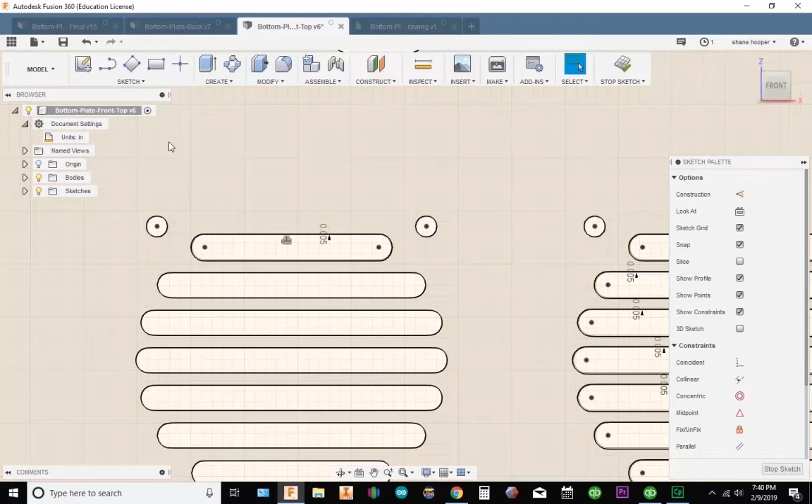And I'm going to offset each one of these over 5 thousandths.

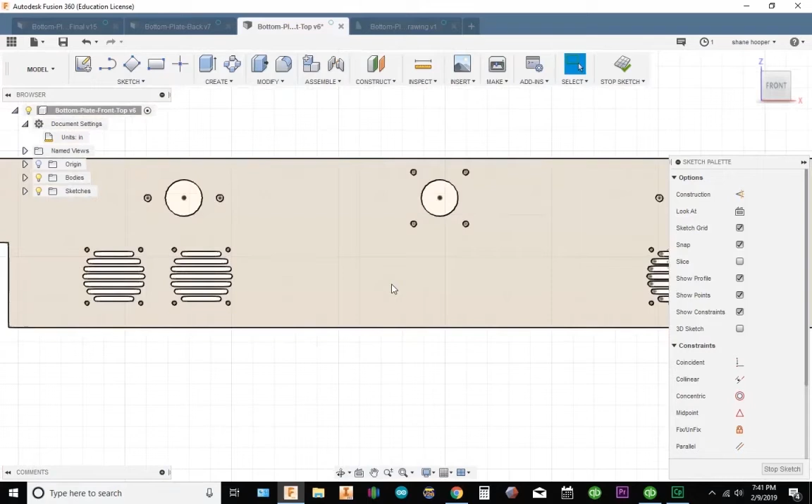Now, I could go through each one of these and do the same, but most likely this is symmetrical, so I'm going to cheat. I'm going to come in and draw a construction line.

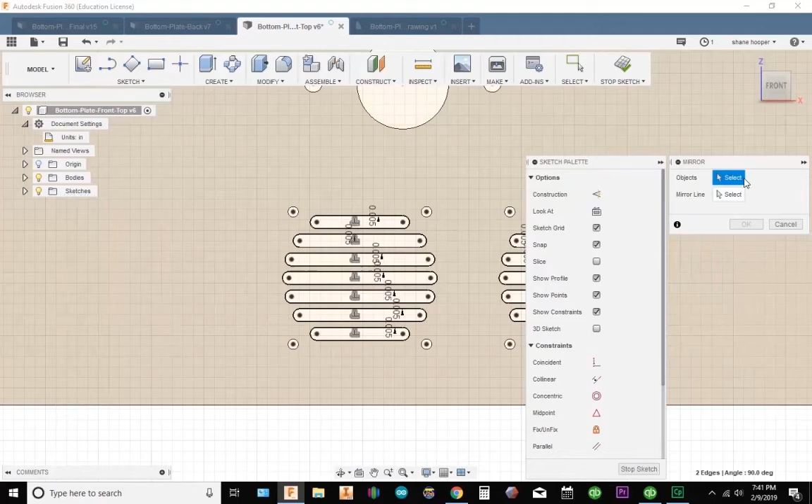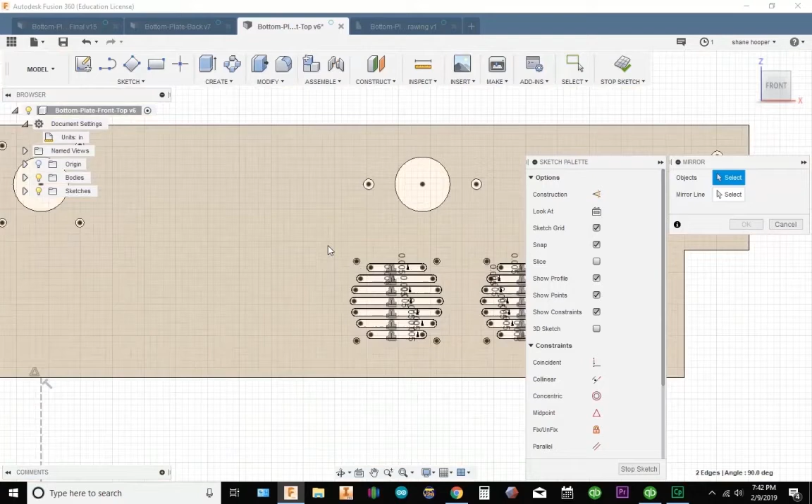And we'll actually mirror all this geometry. So let's go to Sketch, Mirror, Objects. Let's see if it'll just let us select all of this. That's the cool thing about Fusion 360, sometimes you can just cheat.

Alright. Mirror line. I'm going to select my construction line. And what do you know? It's symmetrical. If anybody's got a better way to do this, let me know.

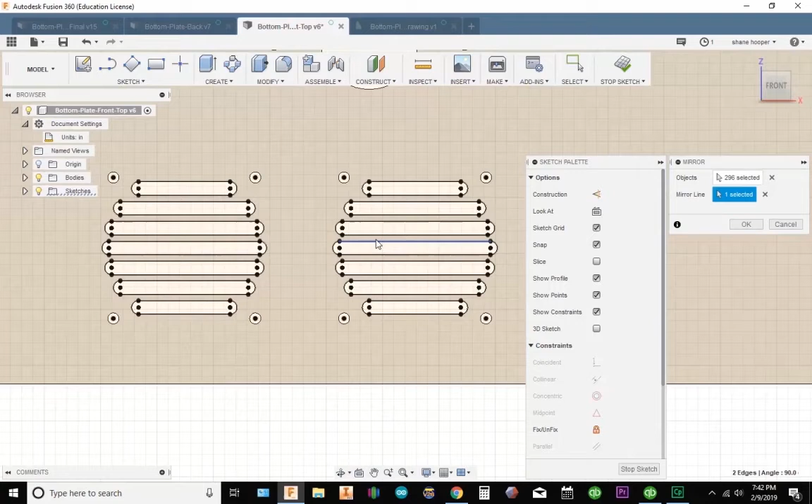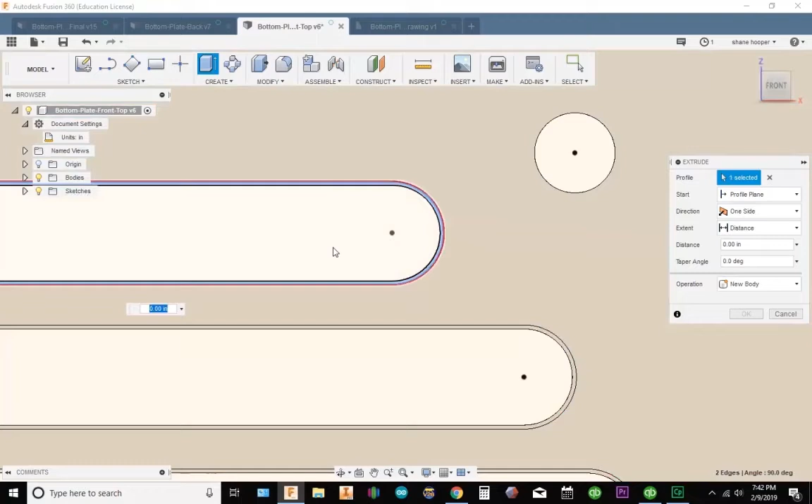So I'm going to hit OK, zoom in, make sure all my geometry is the way I want it, and it looks good. Let's go ahead and go to Create. We'll zoom in. I'm going to select this, this.

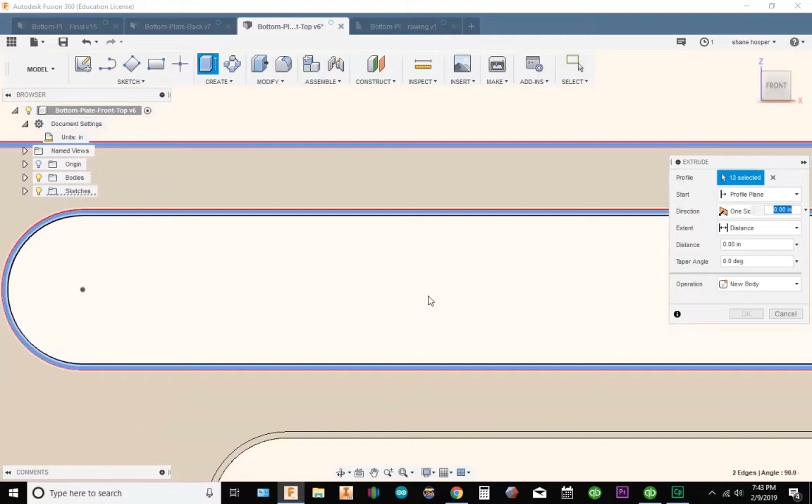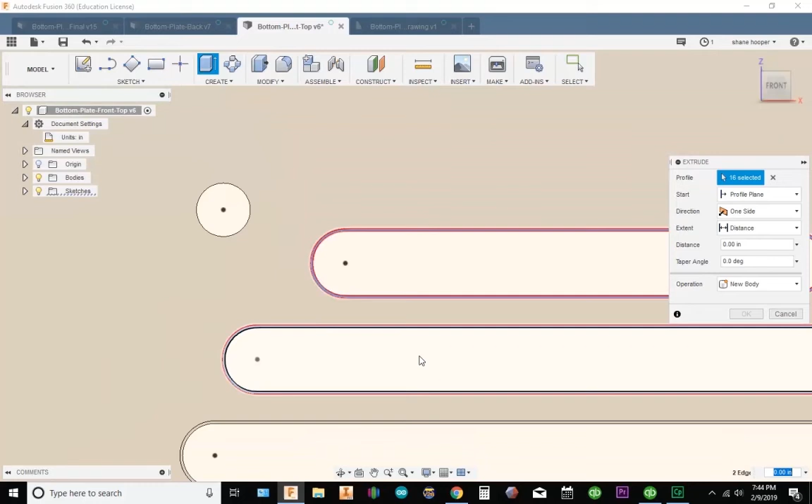And there's probably a better way of doing this. I'm already kind of committed, so we're going with it. If anybody's got a better way, let me know in the comment section, and I'll try it out.

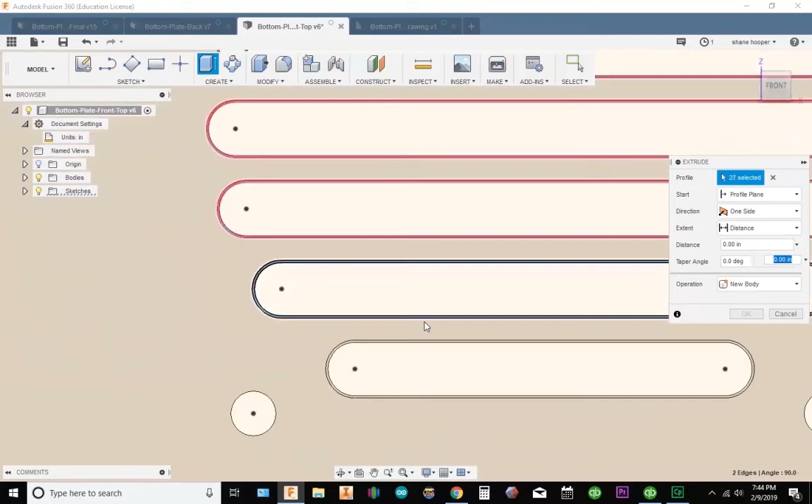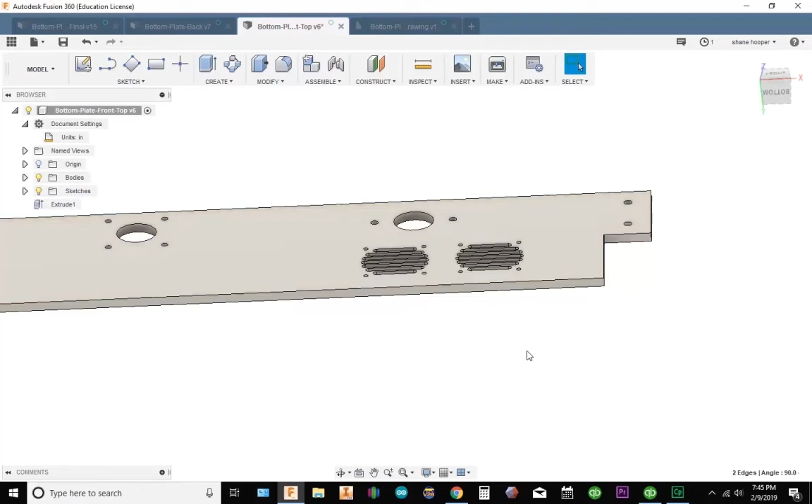Alright, cool. I'm going to tilt my model and pull down. We'll go ahead and put it in top view. And let's double check ourselves.

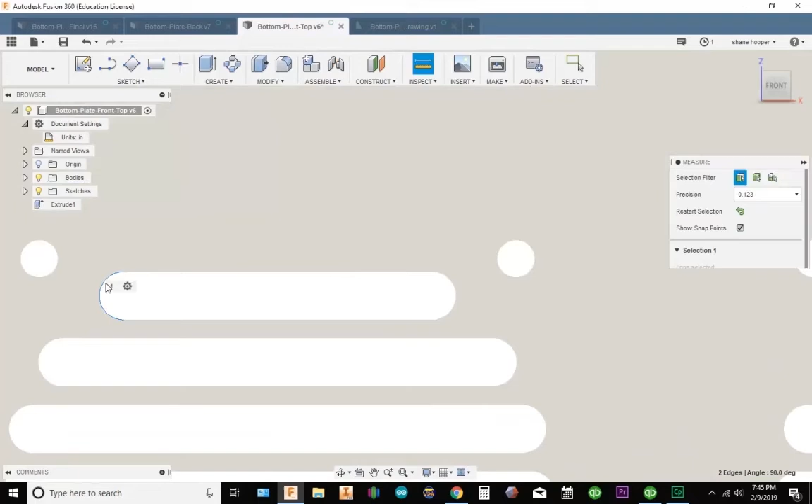So if I measure this diameter right here, it should be bigger than an 1/8 inch. I got 0.128. Perfect. Let's measure each one of these. I'm going to hit I for inspect. And it looks like we got everything.

So what I'm going to do, since I've modified the model, I'm going to save as and pretty much duplicate it as a modified version. I'm gonna hit save.

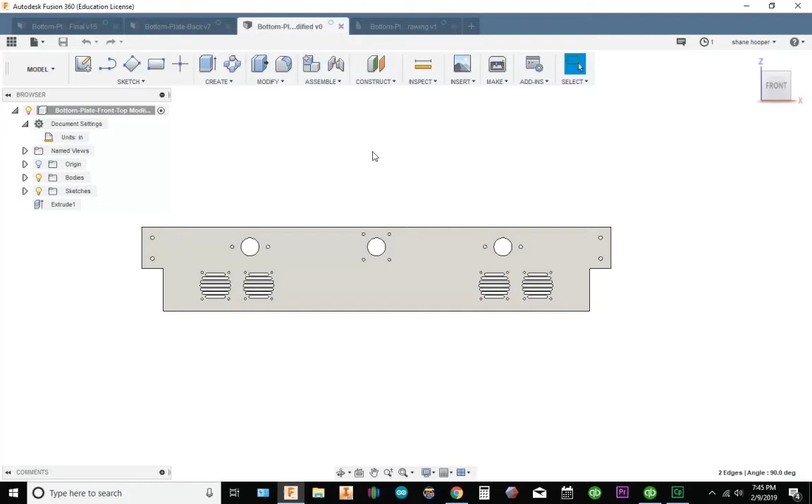Let's go back to manufacture. Now, since I changed the model, it threw up warnings. So I'm gonna right click on my op, regenerate. It's gonna fix everything.

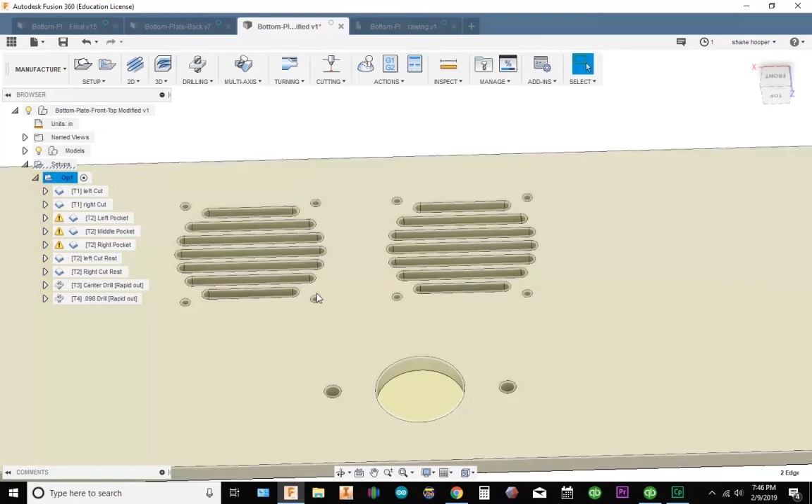Alright, so I'm going to cut each one of these slots. Now these slots are actually vents for a fan for his 3D printer. So I'm going to go to 2D Pocket.

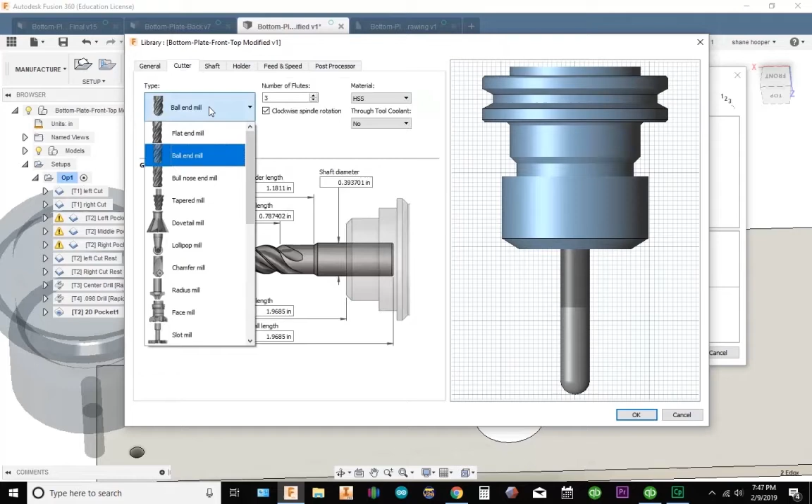Tool. Let's create an 1/8 inch tool. So I'm going to make a 1/8 inch end mill. Go cutter, it'll be flat end mill, 0.125 diameter.

Speed 3500. And since it's such a small end mill, I'm going to go really slow. I'm just going to go 10 inches a minute.

Now, there probably could be a faster way to do this. If you got a faster way, let me know. I'll be the first one to tell you. I don't know everything. Tool number 5 sounds good.

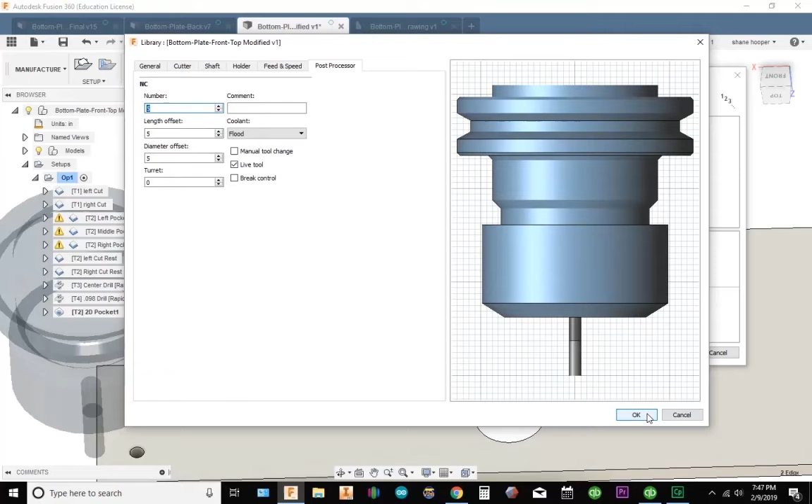Go ahead and click OK. Geometry. Let's go ahead and select our geometry here.

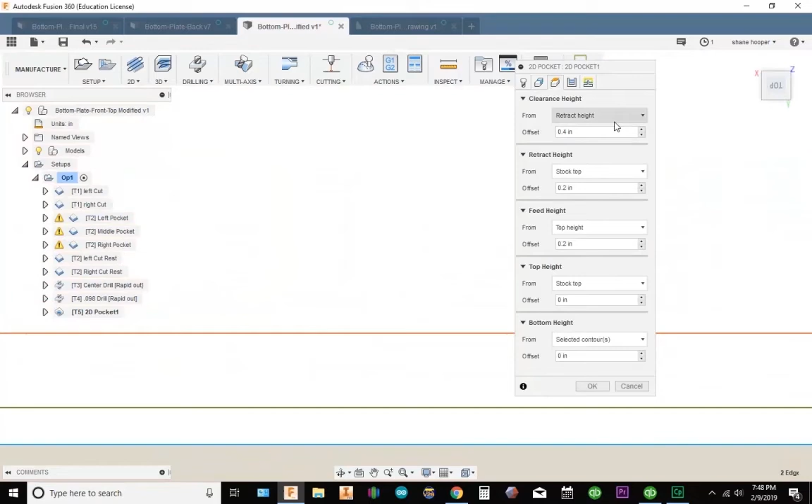Clearance height, because we have clamps, let's go 0.6. Retract height, we're just going to do 0.1. What we're gonna do is pretty much do each one of these vents. Then the last one, what we'll do is then we'll slide over and retract to 0.6. Actually, let's just make that 0.6.

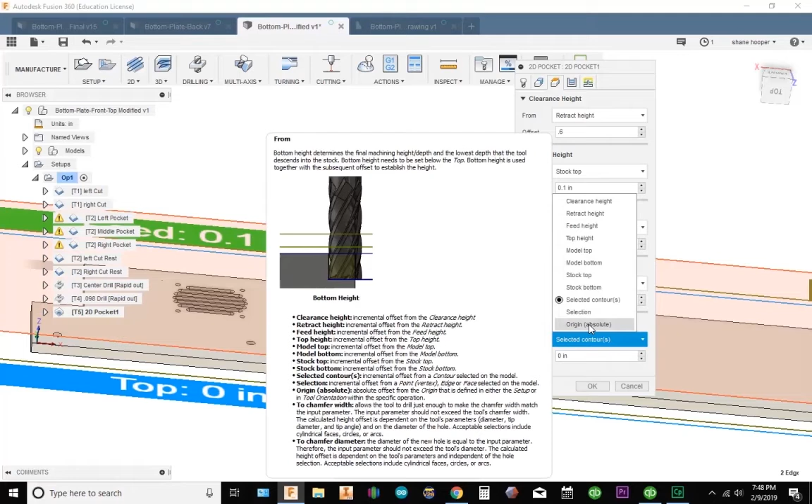Okay, so retract height 0.1, top height 0.1, bottom height. I'm gonna do my origin. Let's go absolute. I'm probably gonna go about 0.035 depth of cut.

So what we'll do is we'll make our offset down. Let's go minus 0.235.

Passes. Right here, my maximum step over will have to be, we'll try 0.12. We have to have room to step over it without gouging the material. Okay, so we'll make our maximum step over. We'll try 0.12, see how it works.

Stock to leave. These are just vents, so I'm not really too worried about it. Now, what I do have to do is go to multiple depths. We're going to go 0.035 depth of cut.

And we'll see how this works. I'm going to use a helix ramp in.

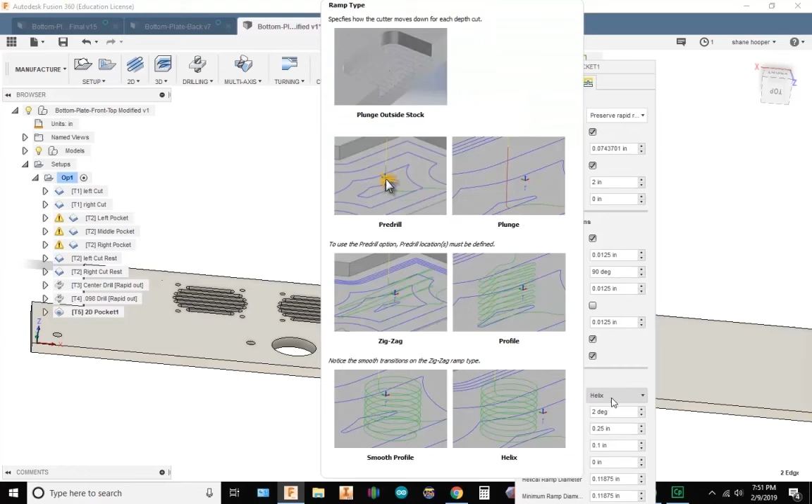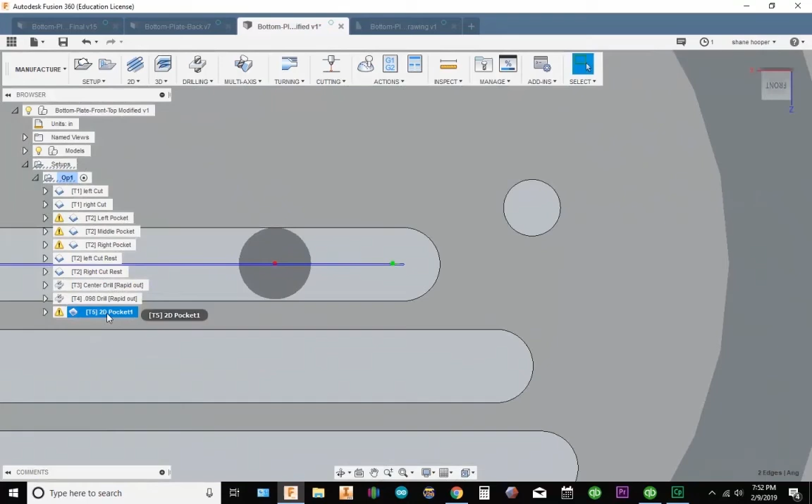Okay, so it gave me a warning right here. Let's go ahead and simulate this, see what it does.

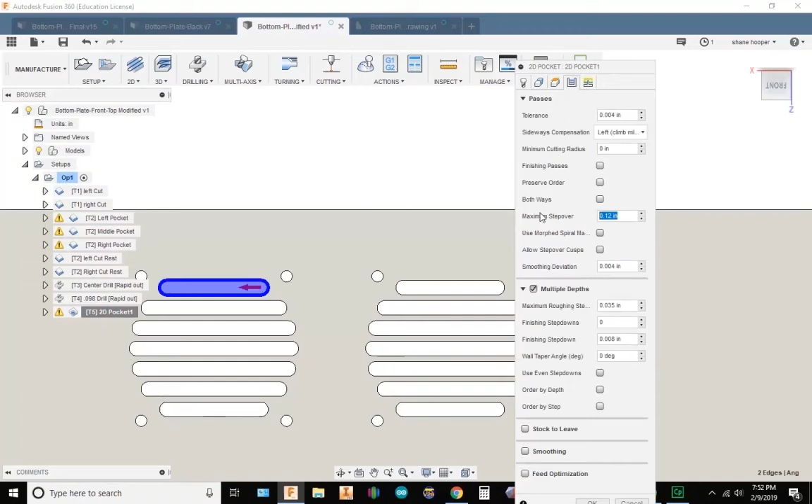So the warning could possibly be that it doesn't like my maximum step over. 0.125. It still doesn't like it.

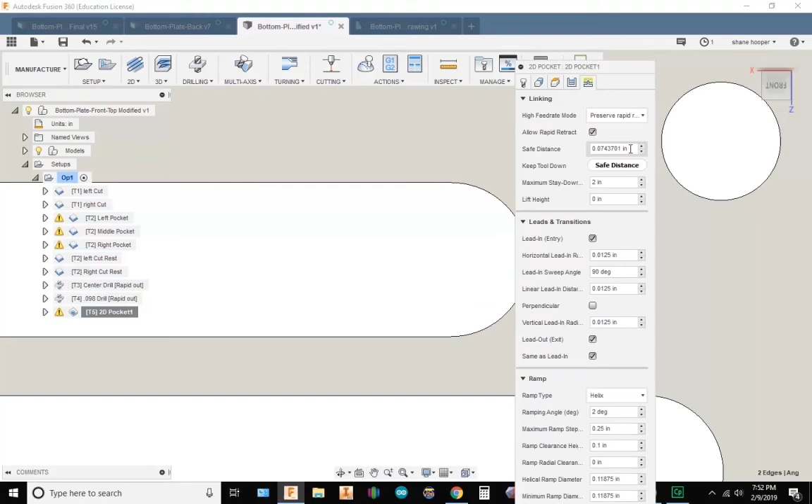Could be my safe distance. Let's try this out.

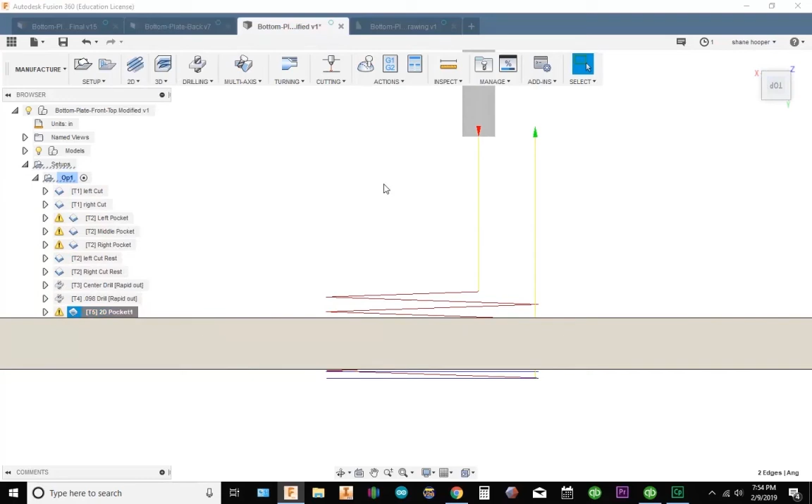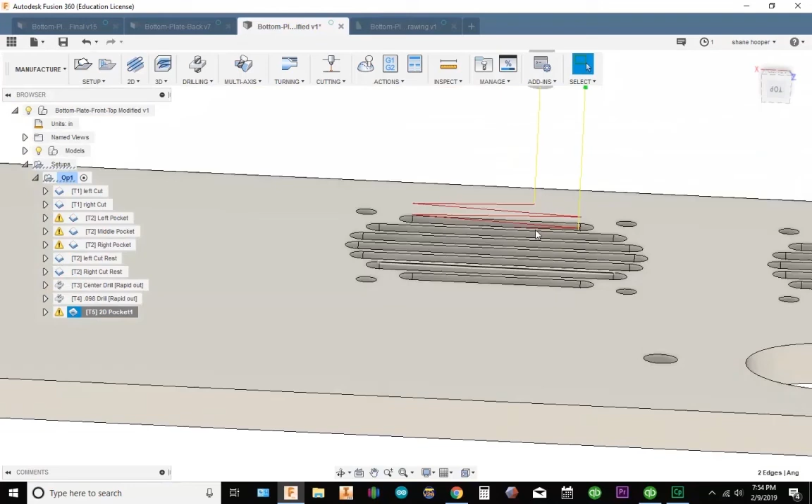Okay, so it's got a little warning in there. I'm not really sure what it is. Everything on my toolpath looks good.

So what I'm going to do is I'm going to go ahead and right click and let's simulate it one more time. And what we're looking for is to make sure that the tool doesn't go outside of the pocket. And everything looks good.

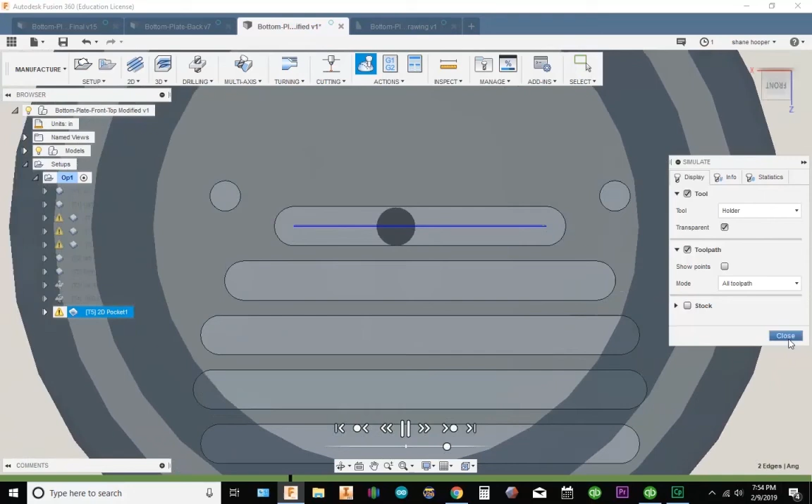I'm going to name this left 1, vent 1. Go ahead and hit OK. Let's go ahead and save this.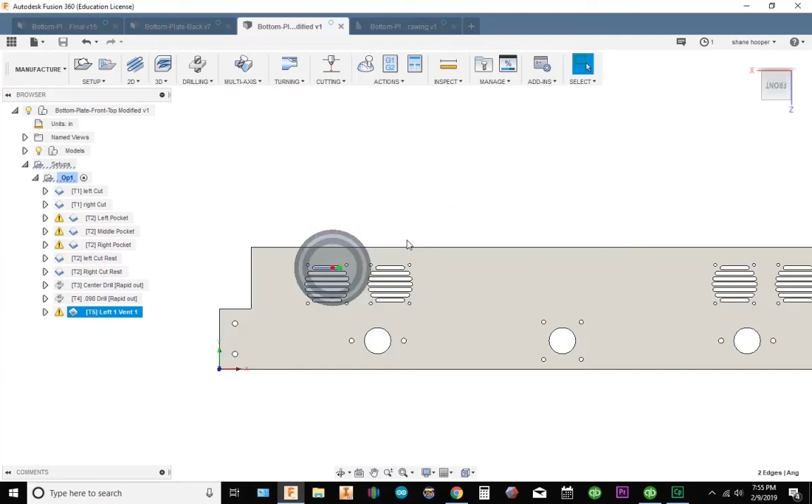Alright, so okay, so I have 7 vents per fan. So what I'm gonna do is I'm gonna go ahead and duplicate this, 6 more times.

So we'll go to duplicate. And I can just select Control D to duplicate this. So I got 1, 2, 3, 4, 5, 6, 7. Alright, so I'm going to name each one of these. Let's name this Vent 2.